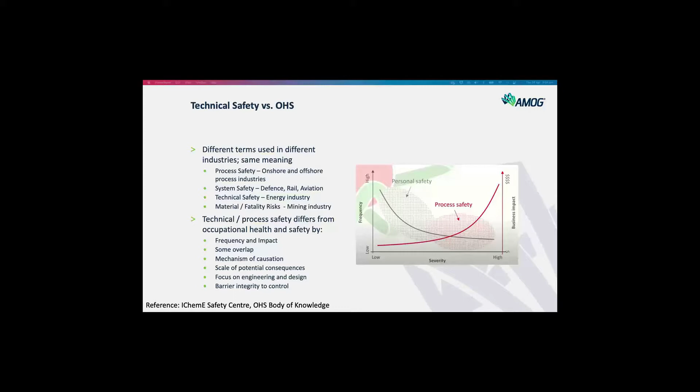So maybe you ask yourself, why is it important to get process safety right or technical safety right? And when we're talking about getting technical safety right, we are referring to both during the project design phase and also during operations and all the other life cycle stages in between and even after operations, such as decommissioning. So some of the benefits of getting technical safety right are qualitative, some others can actually be quantified.

So we could say that, first of all, technical safety and process safety helps a company be more attractive to employees and communities and governments, insurance and investors. Everybody wants to work with a safe company. So this opens the door to a second benefit, where companies considered welcome by communities and governments can expand and evolve with fewer social and political barriers.

Equally important, major accidents can drain out your human and financial resources that would otherwise be focused on growth. So technical safety gives companies this ability to determine their own future by avoiding such failures. So we know that any major process safety, technical safety issue results in an obvious direct financial impact. However, those losses can extend beyond on-site and off-site damage and injuries, especially with incidents that cause property and environmental damage. The companies are seen to suffer adverse financial losses.

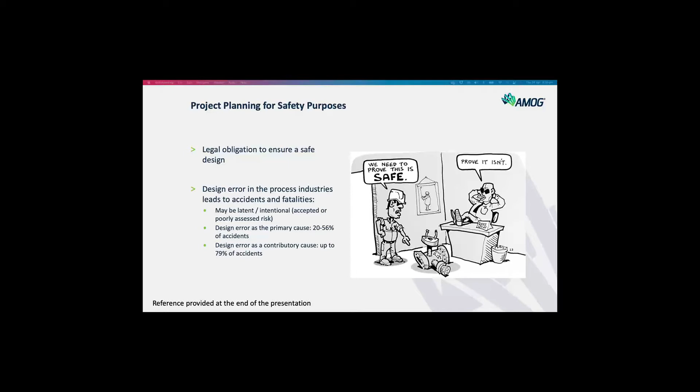So identifying what are your legal obligations and those regulatory approvals, and also if you have any license conditions, very early on, and making them design requirements or design deliverables will lead you to the success of them actually getting implemented throughout the design process.

So we have another poll question here. If you would want to share it, Trish, please. Yep. Okay, so here we go. The poll is now launched. So in your experience, how appropriate and well executed are technical safety aspects of the project plan? So you can go and put your votes in now. And I'm starting to see the results come in, so I'll just give it a couple more minutes to get a few more of the last votes in.

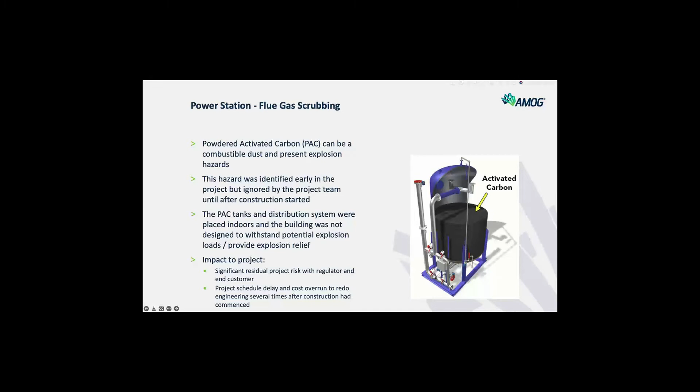Right. Another example was for a pilot plant. This pilot plant handled flammable gas and combustible dust. In this situation, the outcome is a bit better. The client hadn't done any safety planning for the project in the beginning, but it was done a bit later on. So in that way, we were able to save the project. Some of the inherent safety measures that we implemented to manage these hazards was obviously an open structure, where initially the client was considering putting this inside a building. This obviously prevents a lot of that explosion risk.

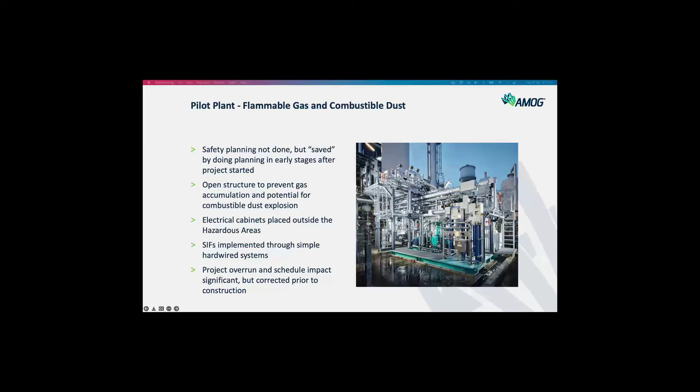There was no need to put expensive electrical cabinets in hazardous areas, and because we picked it up, we could arrange the layout so that they are outside. And if we're talking about safety instrumented functions, we were able to put in very simple hardwired systems, and we didn't need to bother with PLCs and programming and such. Because all of these activities were picked up late, there was a certain project overrun and schedule impact, but in this case it was a lucky example, and they were able to correct it prior to construction.

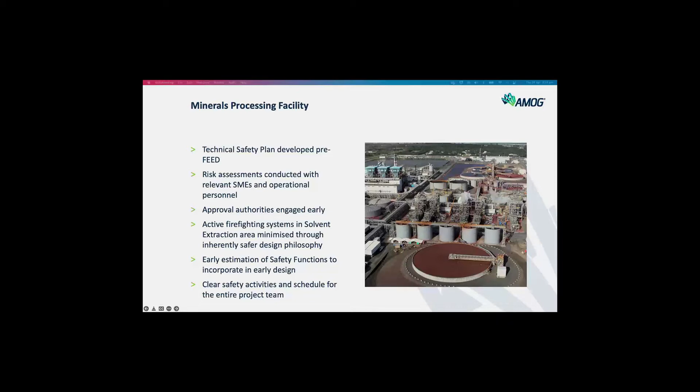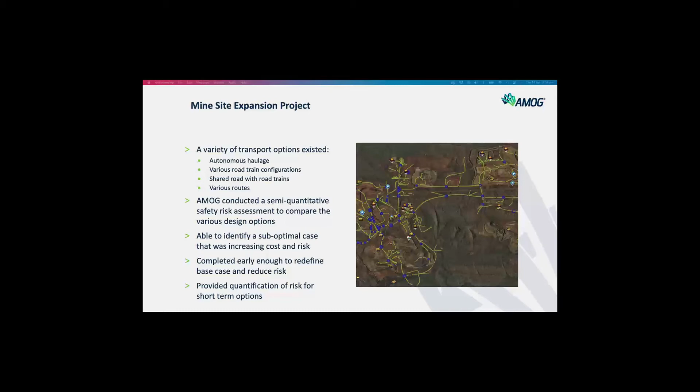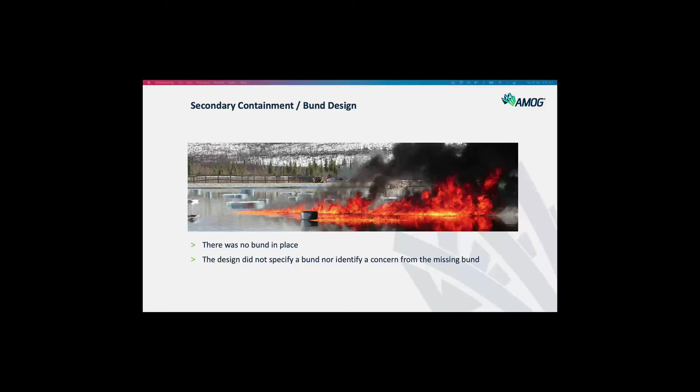So in this situation, the problem from a risk management perspective, regardless of what was done or not done, was that pool fire was a major concern at the facility. So this was one of those items not identified. So there was no bund in place. The project did not specify one to be implemented, nor identified a problem from running pool fires and the impact

All good and nice, but there are some problems with this one, because the fire scenarios were not clearly defined, where we'd have a running pool fire and it can affect the vicinity, and also there's a huge difference between fire load in a building, where we'd see carpets and curtains and timber burn, and the hydrocarbon fire. So from this perspective, the monitors could not reach the fire, because the personnel manning those monitors would be exposed to a very high thermal radiation.

So as we said, the client engaged us before the detailed design was started, to conduct a third-party review. Somehow they started and awarded the detailed design before we finished our review. And then even after we provided the review to the design contractor, they just continued based on the previous firefighting strategy that was developed and missing.

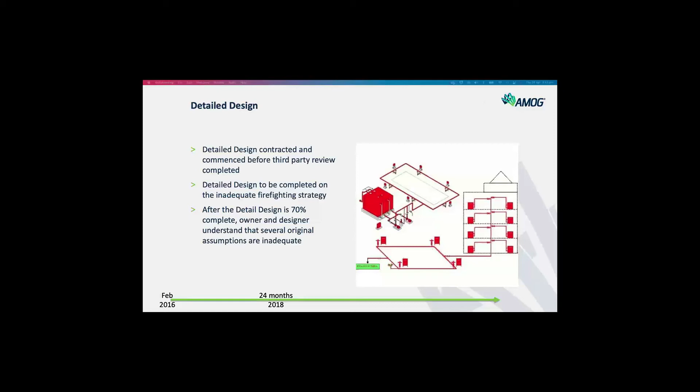So they got to the point of 70% of design complete, and about 24 months after this whole thing started, they go, we're not managing pool fire, we don't have a bund, we have so many original assumptions that are inadequate. Well, they thought, as a solution, we will use the fire brigade to do our response. No more mobile fire trailers, and we're just gonna push on and design the system based on this new philosophy.

However, again, as it happened, the fire authority, which not only needs to approve the design but then also needs to respond to an incident, was not consulted. So we're 48 months down in the project, and we actually don't really have a design. So this kept on going with understanding this and interacting with the firefighting brigade. The firefighting brigade actually got to write to them and say, your design is not conforming, you have a bad philosophy, we may not show up to put out the fire on your facility.

So this is lots of time afterwards, and as you can imagine, the cost associated with this entire endeavor was quite significant. So this would be one of the worst examples we've seen, and I'll pass it on to Steve just to talk on how we can do better so such things don't happen to our projects.

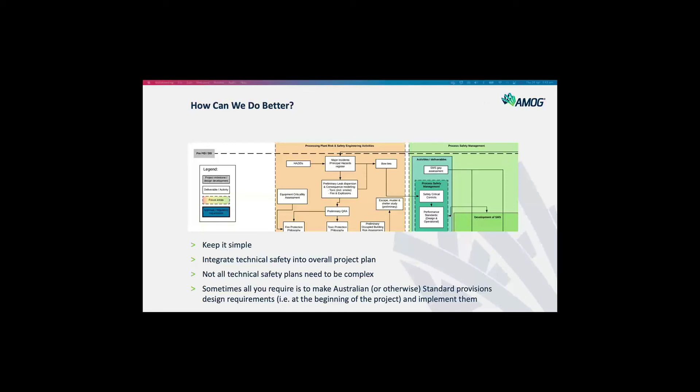The last aspect I want to address is the in-house versus contracted. So this is looking at what is the best way to manage both the planning and the assurance aspect for technical safety. And if we look at the analogy of HAZOPs, HAZOPs have been done for a long time. They've been proven as a very effective tool for managing hazards, and they're run by independent facilitators for a reason.

The premise there is that you provide someone who's not directly involved in the project, who doesn't have either skin in the game or previously made decisions, so they can come in with that clean set of eyes. And it's also similar to what we see in the functional safety standards, where they provide an objective judgment call into the process.

So if you don't have independence available within your organisation or available to the project, then it's best to look at getting that done by someone else in that particular expertise with the independence. And then what you're trying to make sure occurs is you've got both the quality that's required executed, and also that you don't have activities missed or assumptions made and then not reassessed or not considered in the end.

Too often what we hear from some clients is, it's too complicated, or that's not the way we do it, or, we do it this way. And the problem there is quite often that things that need to be considered, if they're not exactly the same and it's not a cookie cutter from the previous job, there will be things missed that should have been picked up earlier on.

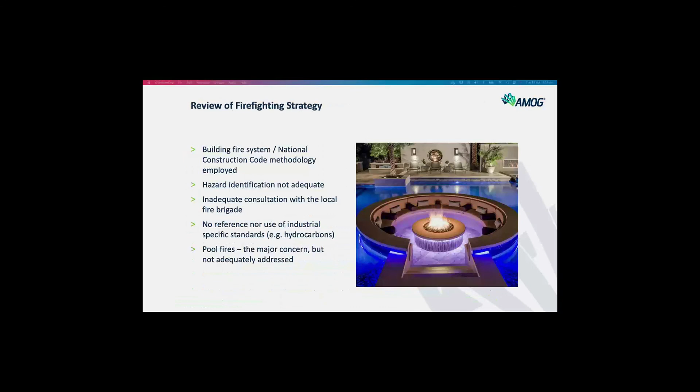Okay, so that was both project managers and who was the second one, Trish? Project engineers. Oh, okay, completely different strategies. I guess project managers are the decision makers. They're the ones that need to understand how to deliver the project. So for them, it's a little bit more around the project delivery and understanding the different studies and the interactions. So they need to understand how it impacts on the delivery of the project, and also the importance of completing the studies early on, so you can lock in some of those design aspects and not have them either floating as something that's not been locked in or something that needs to be changed later.

For the project engineers, it's more their technical involvement in the area that they're involved in. So although you might have a mechanical engineer that's not directly in the process safety team, or in the team that's looking at the instrumentation and the control, they are going to have some critical aspects in the mechanical engineering, with regards to things like material selections or design codes for cyclones, or whatever their particular inputs are. So for the project engineer, it's more understanding where they fit into that overall delivery. For the project manager, it's about understanding the critical parts to the delivery and making sure that the timing's done appropriately. So that's, I guess, what they need to know.

The best way to get that to them really is going to depend on the organisation, the time you've got and the resources you've got available. There are, I guess, different resources available in the written space. So I mentioned before, Body of Knowledge is a really good reference for understanding hazards and systems to manage. But then there are also tools for higher management type decision makers as well. So I know IChemE also runs a course related to process safety up to the board level.

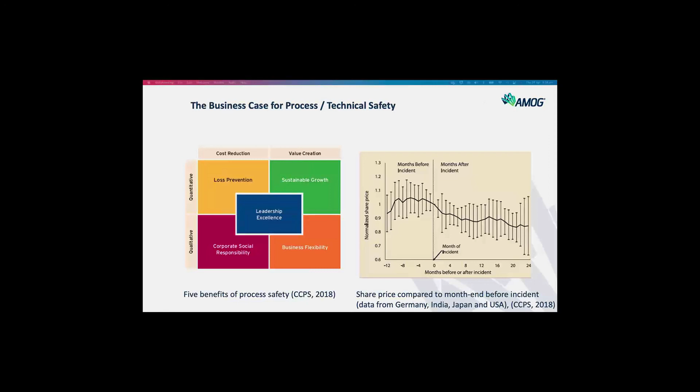Yeah, and what I'd like to add is who's doing the assurance. If it's an internal project manager to the company, is the technical authority doing the assurance, or do you need to get somebody in? If it's an external party, a design contractor and such, does the owner have engineers qualified that can do that assurance and make sure that they are actually doing what they're supposed to do? So this is just on top of what Steve was saying.